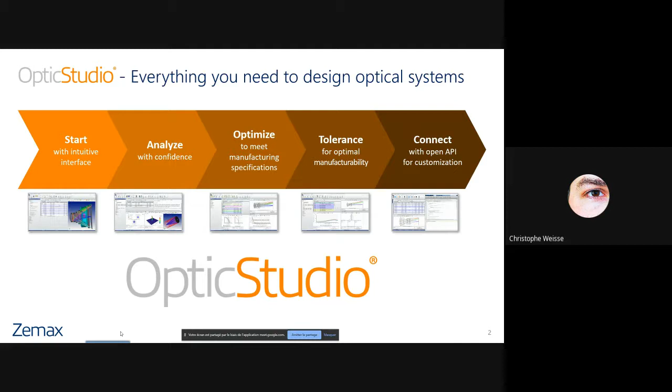And this year we have launched a new module, the Star module, that integrates into OpticStudio and facilitates the workflow between the FEA tool and OpticStudio.

So the Star module, well, the name is quite explicit. STAR stands for Structural Thermal Analysis and Results. This module enables you to load, visualize, and fit the data produced by finite element analysis simulations inside OpticStudio, update your OpticStudio model, and analyze the effects on the optical performance of your system.

For those not familiar with finite element analysis simulation, this is the kind of tool you need to see how your optomechanical system reacts when placed in any challenging environment, like very hot or very cold environments, and also when the system is submitted to shock or vibrations.

It is also very important in the case of very high power beams, like high power lasers, where the optical beam itself produces heat into your system, and this heat has effects on the optical quality of your system. So it's very important for many applications to double check the effect of those side effects, so to speak.

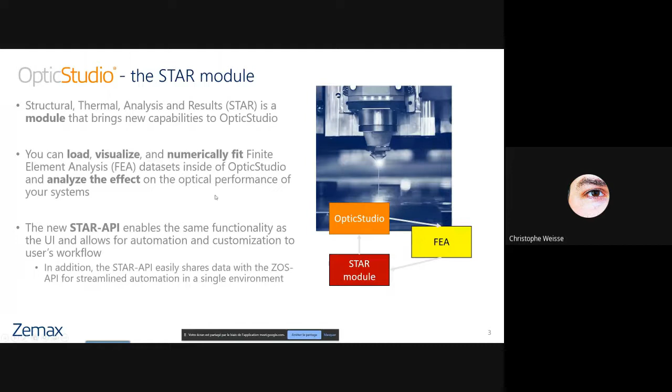If I use the high power laser example, it shows you how our different tools and modules can integrate into a possible workflow and really facilitate your work.

For instance, when you want to design such a system, you would start using OpticStudio in sequential mode, which is the most appropriate mode to design any kind of imaging system. So you can design the optical system and assess the nominal performance of your laser system.

Then you can use Optics Builder to facilitate the workflow between OpticStudio and your CAD package, Creo at the moment. Once you have added and designed all the mechanical parts around your optical system using Optics Builder, it is also very easy to go back to OpticStudio non-sequential mode.

And compute, if needed, the absorbed power inside your system, because when you have a very high power laser, the beam itself is heating those optical elements due to absorbed flux.

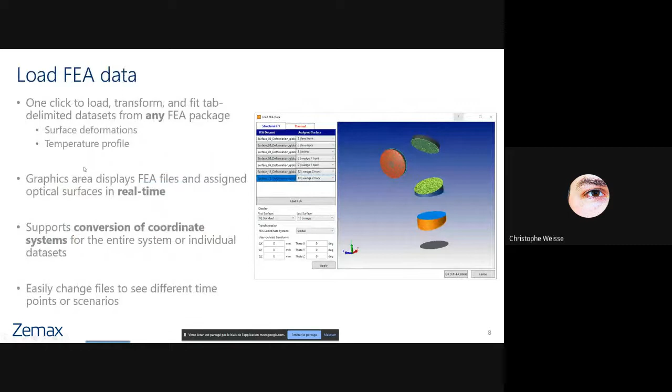So, maybe some additional details here about different aspects. So in principle, as you saw here, it's rather easy. You basically select your FEA dataset, hit OK, and use OpticStudio to see the effects.

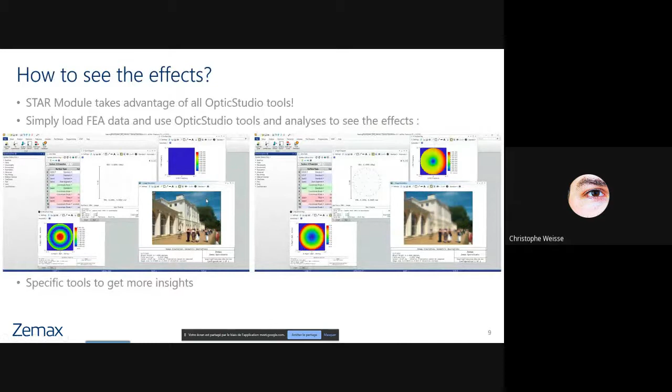So really super easy. If we want to dig into more details, first we need to start with the kind of data that the STAR module is using, and to make the STAR module able to connect with virtually any FEA tool out there, we chose to have a very simple input data structure required.

So we are actually using a text file with very simple data formatting. So for the structural deformations, XYZ position, so the nodes, so to speak, and the displacement along each axis. And similarly for the temperature, XYZ position, and the temperature.

Almost all FEA tools - I say almost because I don't know all of them, but all the well-known FEA tools, FEA solvers out there have the ability to export the results to text files. Some to that exact format, some others to similar formats, but since there are text files, it's quite easy to post-process and to format to that particular format.

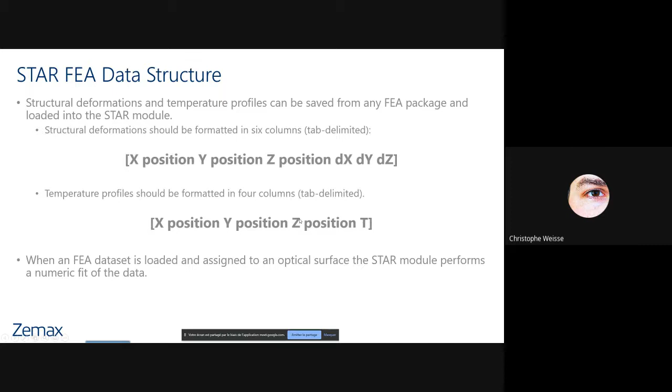So just to make it crystal clear, we are using surface data to model the structural deformation, and volume data to actually use the temperature information in each point to create a gradient index material inside your system, taking into account the material properties that describe how the index changes versus the temperature.

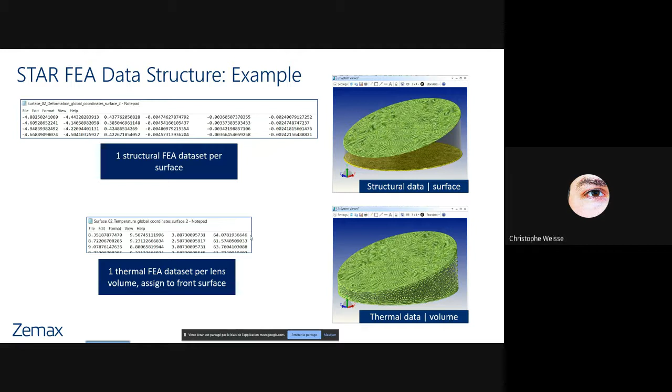So very important aspect as well, when you import FEA data, like raw unprocessed FEA data, it is not that easy to use by OpticStudio for many different reasons. The type of the mesh that is used by the FEA data is quite different from what we are using in OpticStudio, and sometimes you need to use a rather high number of points to make the FEA simulation accurate.

So what we have seen during our tests is that very often the FEA datasets have somewhere between 10,000 and 100,000 points, so quite a lot. We actually had a meeting yesterday with an OpticStudio user that told us that they are trying to use FEA datasets with billions of points, so even worse. So at that point, there's a need to make a fit to keep the simulation time reasonable.

The traditional approach here is to use Zernike polynomials, but during the development of the STAR module, what we have seen is that this is not the optimum method, especially because if you want to reach the desired precision, you need to use a very high number of Zernike coefficients.

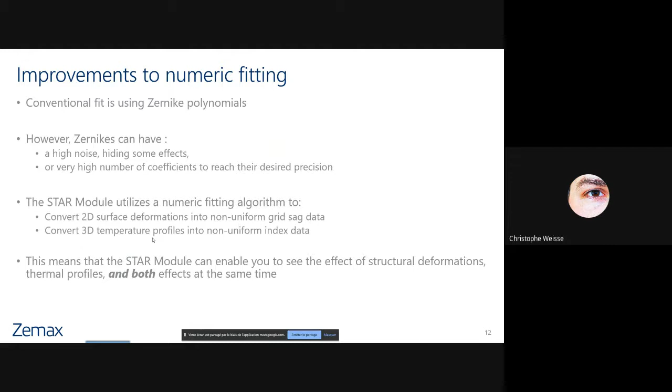Of course, we have a tool to assess the quality of the fit so that you can compare the fit that has been made automatically by the STAR module and the initial FEA data. You can also change the fit parameters if for some reason this doesn't seem accurate enough for you, but you have the ability to review and control how that fit is done.

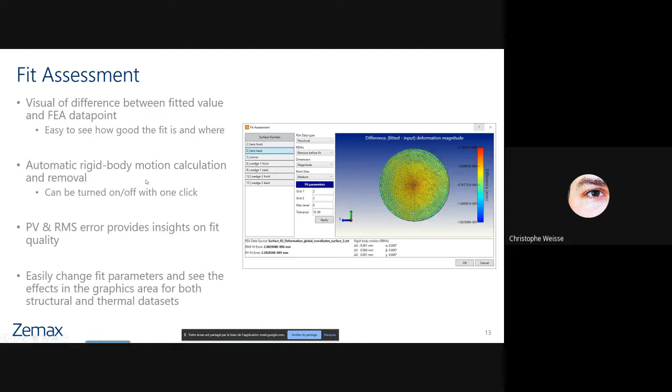Yeah, so I already explained that because I tend to talk quite a lot. So since all those effects are dealt with using layers, you can turn those layers on and off, so you can activate or deactivate the effects surface by surface or element by element, or you also have shortcuts to do that as a whole for all the structural effects and all the thermal effects.

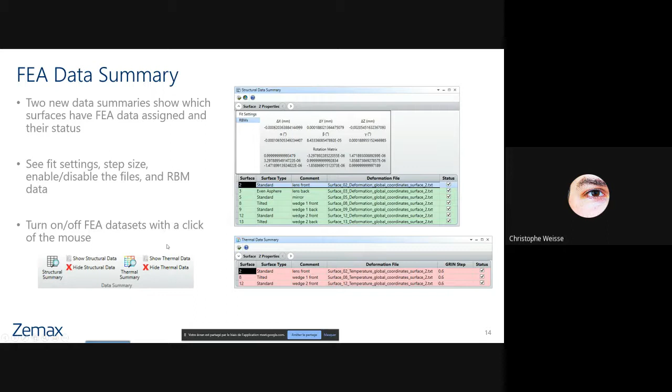We have also specific tools to provide you with additional insights about your system. So you have system viewers that can show you the deformation and how they are located into your system. Index maps as well, so that you can check what is happening for your materials.

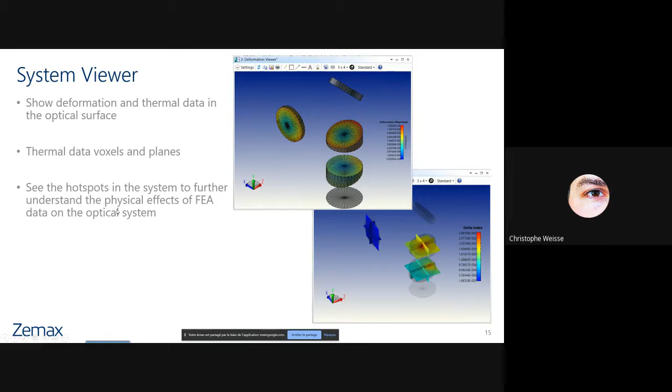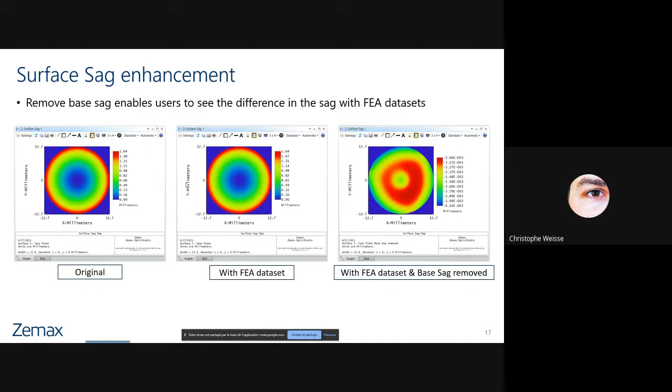2D deformation plots let you decouple what is happening along each axis. We've also added options to existing tools inside OpticStudio, such as the surface sag map and the Wavefront Map. You can now remove the original shape to display only the difference between the two versions of your system, with and without the structural deformations, because otherwise it's not easy to see the difference. When you subtract the original shape from the altered shape, you can see there is quite some difference, and it's actually not linear. It's kind of wavy, so likely to have an important impact on your system's performance. Same here for the Wavefront Map as well.

Do you have any questions, or do you wish me to show you how it works directly in OpticStudio? I think the attendees can raise a hand or write in the chat.

Maybe I have a short question. Is this procedure done in an iterative manner, like one cycle and then a second cycle, third, or just one cycle? You know what I mean - like we get the structural thermal deformation data from FEA, put it into OpticStudio, get the new analysis results, and then can we give this back to the FEA and obtain an updated structural thermal analysis and feed it back one more time?

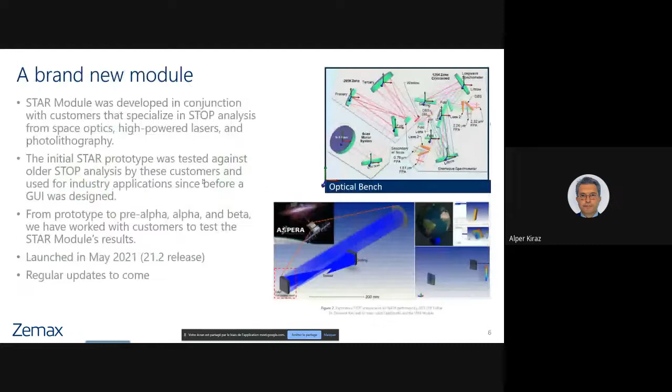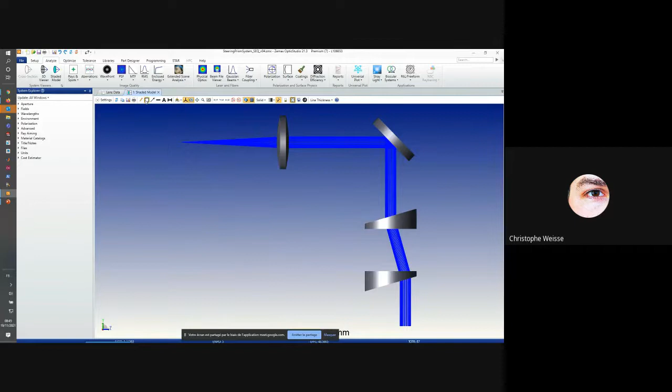Let me quickly open OpticStudio and show you how this works. So we have a new STAR module here in the interface with all the specific tools, and of course you always have access to all the other tools. This is a beam steering system, a rather simple example just to make it quick to demo, understand, and use.

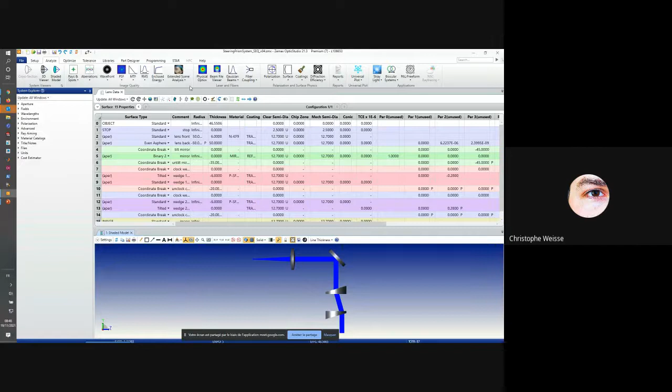This is a quite nice example because there are different types of surfaces, so standard surfaces, aspheres, and we also have a lot of coordinate breaks, so tilted faces, tilted mirrors, and so on. In a situation like this, if you don't have the STAR module, it's really not that easy to use the FEA results to update your optic.

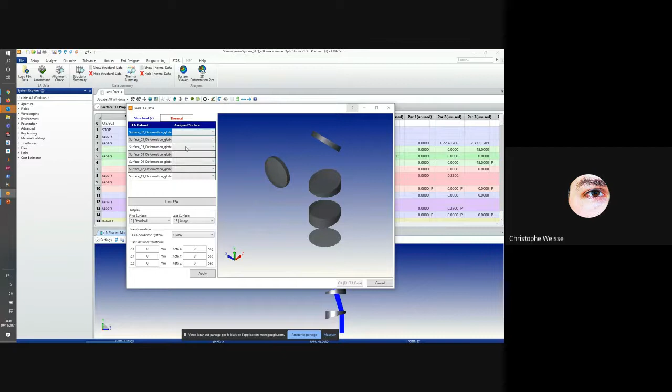To update your optical design file, the first step would be to load the FEA data. You can simply select a set of files directly, so all the structural files right there, and you can assign a data set to a particular surface. You can see live that it is showing the shape of the FEA data and where it is positioned.

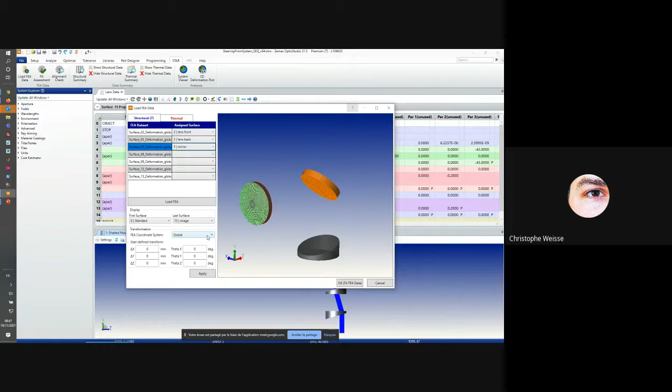If I consider the mirror, everything is going smoothly here because we kept track of the global coordinate system reference along the process. But if for some reason we would have lost track or changed the definition—I'll do that on purpose now—if you select the wrong option, you will directly see that the data set is not properly positioned in space, in your system, and it won't produce valid results.

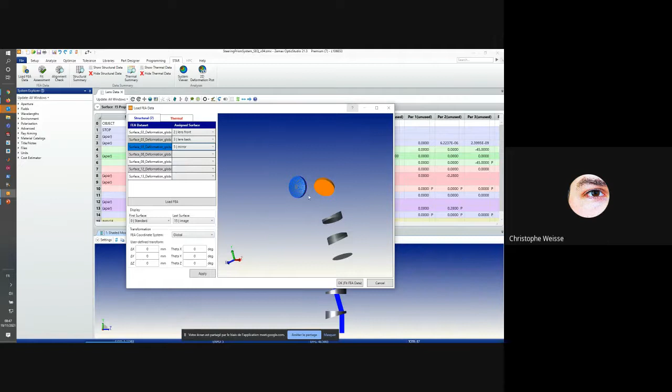With this visualization tool, you have the option to directly see where the data is applied and, roughly speaking, how it looks. You can do that for all the surfaces, of course.

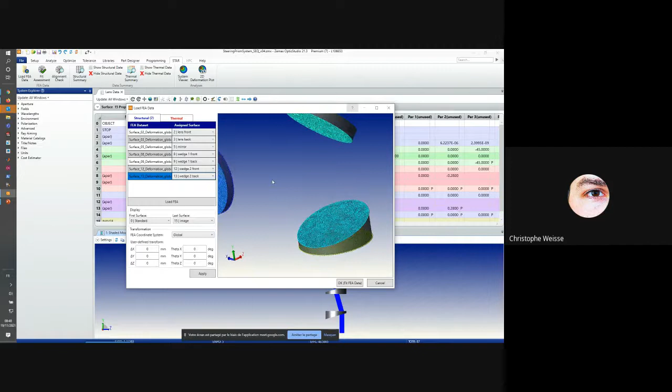Let me do that. So this is surface information for the deformations, and you can do the exact same process for the thermal load right there. Now when you assign a data set to your system, you can see that it is actually a volume, right? And you can do that for all the other elements, wedge 1, wedge 2.

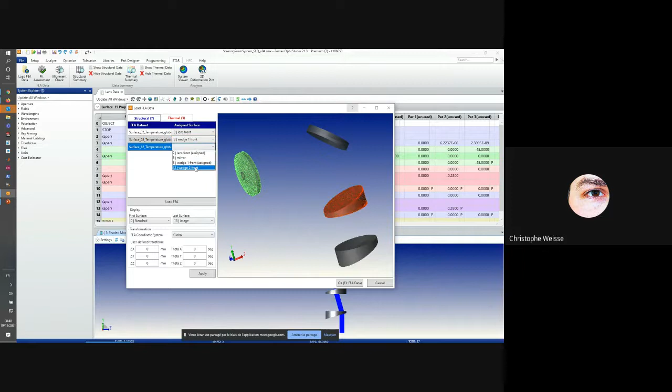When you click OK, the STAR module will basically do everything for you, fitting the data to have an efficient model of your surface and applying the effects onto your system.

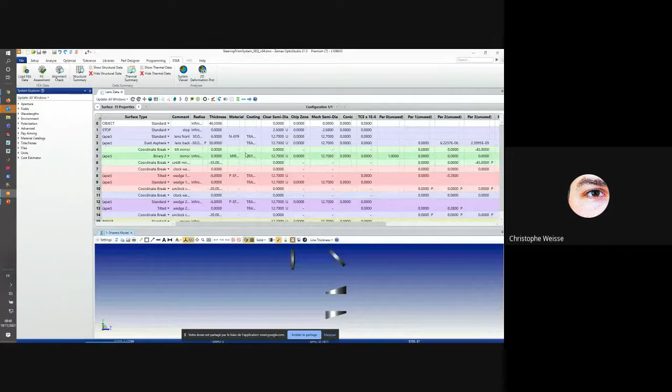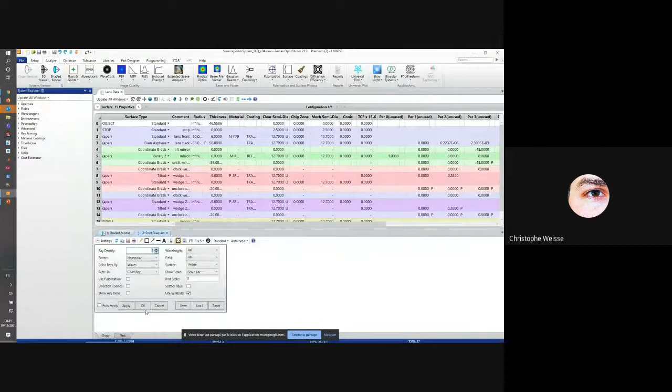So as you see, no change in the editor, though when you use any analysis tool—I'll simply use the spot diagram because it's a quite easy tool to use and interpret—let me make the density a bit higher so you can see it more easily. Now you have the results that take into account both the structural and thermal data to compute the updated performance of your system. This is a spot size in angle space, so units are in milliradians.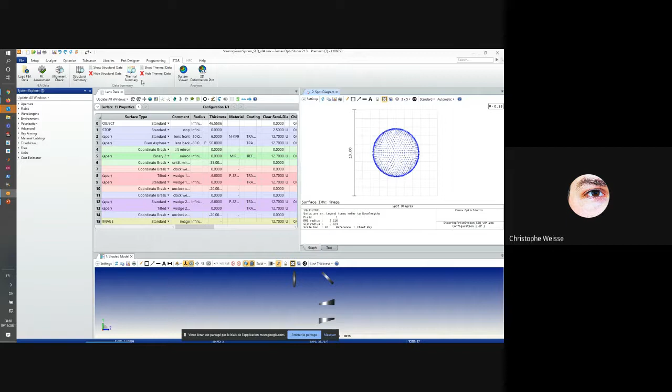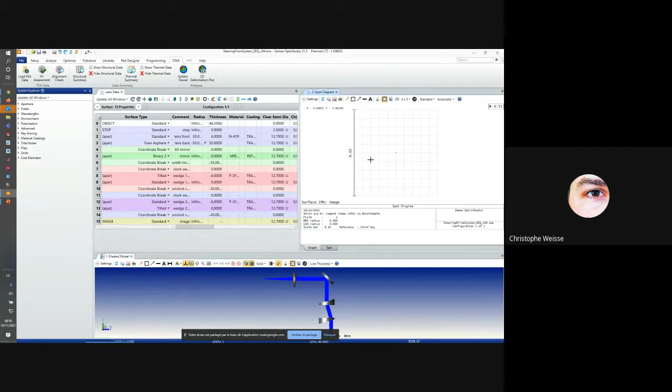This is actually showing that the beam is not fully collimated anymore. If I unactivate all the thermal data, the spot size is updated, so it looks bigger, but the scale has changed, so it's actually smaller. If I hide the structural data as well, then you will be back to the nominal state of your system with a perfectly collimated beam and a zero angle of divergence.

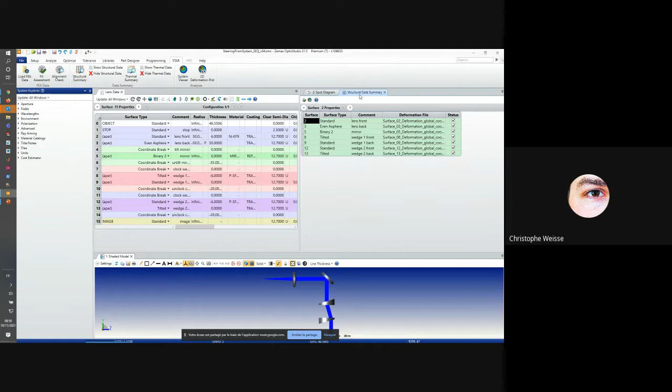You can reactivate the structural data or the thermal data for all the elements, or if you open this structural summary window, you can also activate or deactivate some data sets.

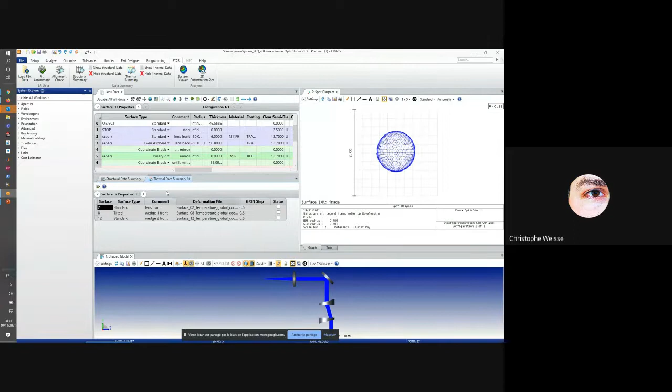If you want to see the impact of just this lens here, the first wedge, you can see that—you can read the value right there. You can do the same for the thermal data if you want to see the combination of both structural and thermal data for that particular lens. You just need to click that box, and the results will be updated, taking into account both effects.

This type of feature, being able to easily activate or deactivate specific data sets, is really very helpful, and we have very good feedback from users, because this is really something they didn't have before, helping them speed up their analysis time by a quite important factor.

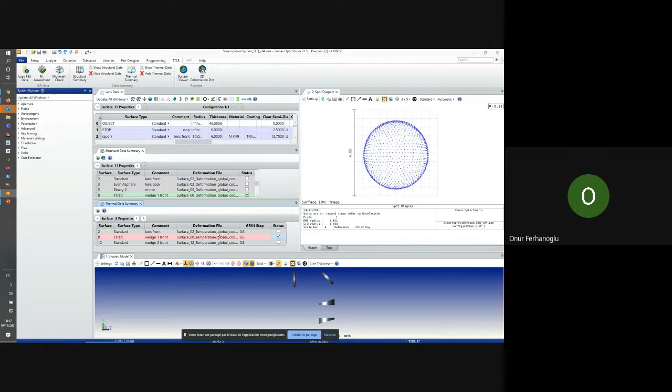Yes, Onur Ferhanoglu, myself again. So these optical elements are normally positioned in a housing, like this. Can we, for instance, simulate a heat effect, a temperature load on the housing? Because that would maybe decenter or tilt the optical components.

Yes, important question indeed. If I go back to this presentation really quickly, when you make the FEA simulation, the structural and thermal simulation, you need to take into account also the mechanical parts, right? So that this simulation is accurate, and you need to define all the material properties, thermal load, etc. The FEA tool will take all that information into account to compute how the whole optomechanical system will be modified. Sometimes the surfaces are deformed, but in other cases, as you explained, the whole shape of the structure may change.

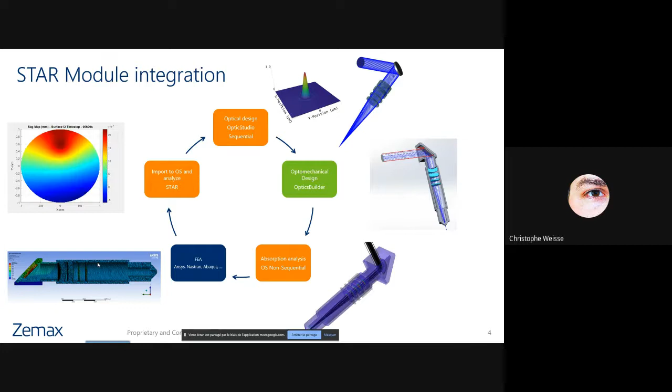The easiest to understand modification would be an elongation of the housing due to heating, simply because the metal expands. But there could be other effects, such as lens displacements or tilts, and this is actually taken into account directly by the FEA tool.

So the results that we get when loading these structural files here are often actually a combination of a displacement and an actual deformation. The displacement is often called a rigid body motion, and on top of that rigid body motion, the displacement of the whole element, you also have a deformation because of the stress that is applied to your lenses.

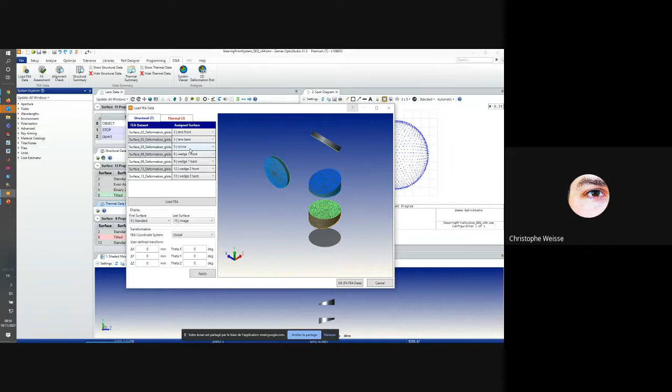You can see how both of those effects are combined when you open the fit assessment tool here. Not only can you check this, but maybe I can use another surface. You can check the difference between the raw FEA data, as provided by the FEA tool, and the fitted model that the STAR module has created.

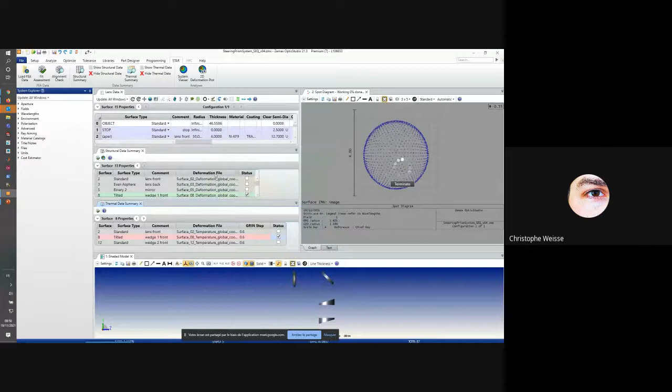If you do not remove the rigid body motion, then apply. Oh, it's not updating, sorry about that. You can see that in the structural data window though. Interesting, why is it? Well, you can see that as well in the structural data summary here. No, not what I wanted to do. Sorry, right there, let me make that window... I cannot.

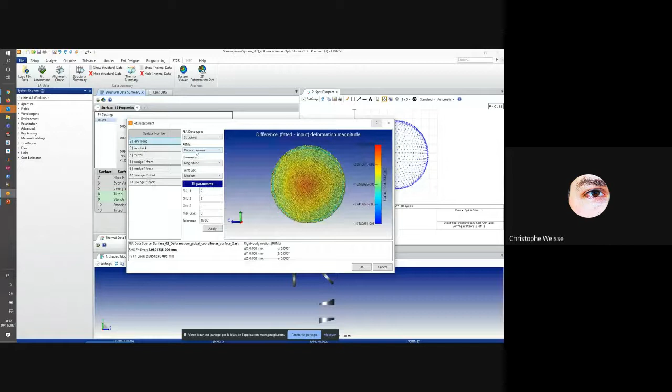So you can display the rigid body motion values, right? And if you choose to not remove it, okay, should be all zeros right now. Oh, of course, I selected it for another surface, this is why it was not working. So you can see that for surface 12, I chose not to compute the rigid body motion, so to use the FEA dataset as is.

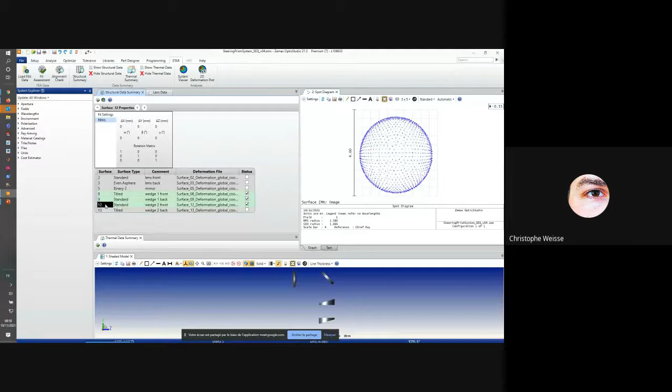So we give you the option basically to decouple both effects or to combine them. I hope my answer was clear enough, because I got a bit confused since I didn't apply the option to the proper surface, and I wasn't able to see the results afterwards. Sorry about that.

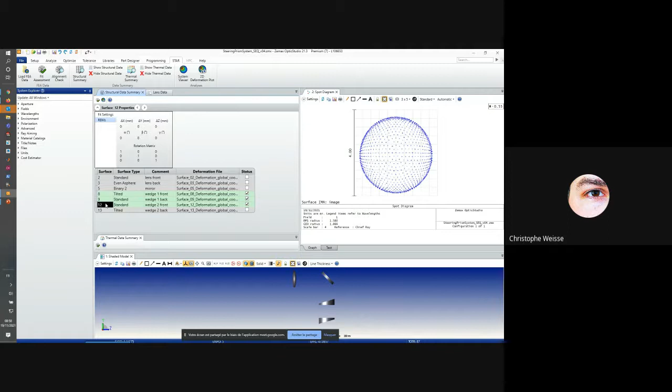Okay, in that case, Christophe, thank you very much for your very insightful presentation. Thank you. On behalf of all the attendees, we couldn't simulate this in a virtual manner. Next time, we have to find a solution for the applause.